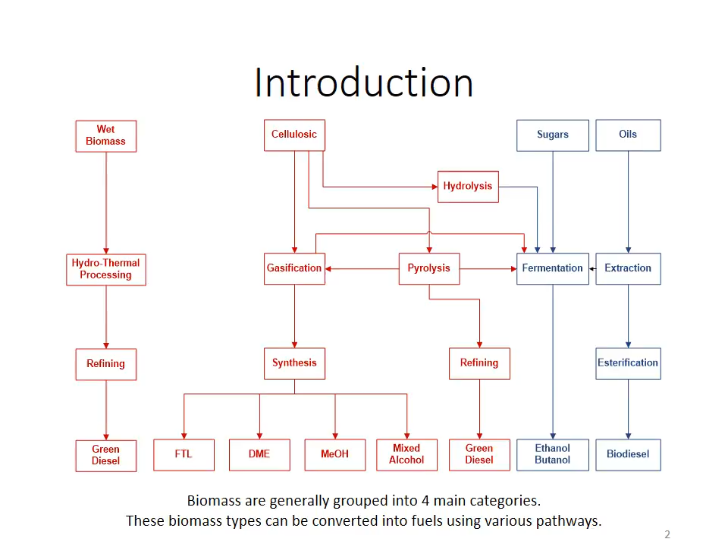The biochemical conversion is a relatively mature and straightforward conversion pathway. You start with biomass, which is brought into a facility. It goes through feedstock handling and pretreatment. In the case of ethanol production, the pretreatment is simple steam and acid to expose the sugars. Those are then sent into the solid liquid separator to remove any dirt and grime that you may not want in your conversion process.

Eventually, after conditioning and preparing it for the microbes, you can send it to the saccharification and fermentation tanks, where you're bringing enzymes that can help convert and digest these sugars into alcohol. A byproduct of this process is carbon dioxide, which is often sold to the beverage market or other alternative markets.

The alcohol water stream is then sent to distillation. Usually the raw stream has a low concentration of alcohol, and so we use distillation to purify it to over 95 to 99% ethanol. The remaining water is removed through dewatering. It usually contains the lignin residue as well, and so the lignin residue can be sent into a burner or boiler to produce steam and electricity.

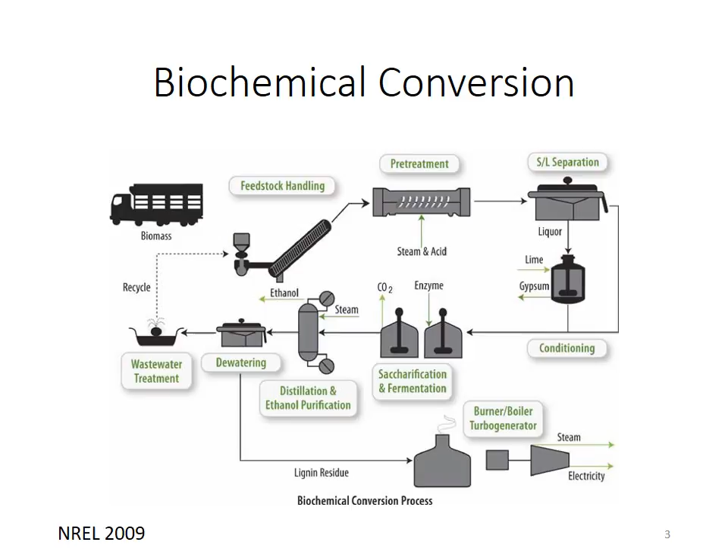What we'll see in the thermochemical platform is that not only have we increased the complexity of the process, but many of the different steps in this process operate at fairly difficult conditions. They operate at high temperatures and pressures.

So we see, starting from the left, the biomass is brought in. We also have some feed preparation. In the case of thermochemical conversion, this includes grinding the biomass, chopping the biomass into fine particle sizes, and ground biomass can be sent to a dryer, which will operate more efficiently on smaller particles than on larger particles. The dried biomass is sent to the reactor.

In the case of gasification, which is shown here, you would have the biomass mixing with some hot sand in order to heat up the feedstock to its operating condition, and this could be well above 900 degrees Celsius. When you heat up biomass to that temperature, it will break apart into its constituent molecules. Eventually, you want to produce a rich stream of syngas. Syngas is called this way because it's considered a synthetic natural gas, and it contains mostly carbon monoxide and hydrogen.

In the case of converting biomass to syngas, there are a lot of tarry components. These are viscous, petroleum-like liquids that come out with the raw syngas. Those have to be removed in order to not damage the downstream upgrading equipment. And so we use the tar reformer to do this. The tar reformer either scrubs them out or you can combust them as the stream goes through. Once you remove the tar, you have a relatively clean syngas.

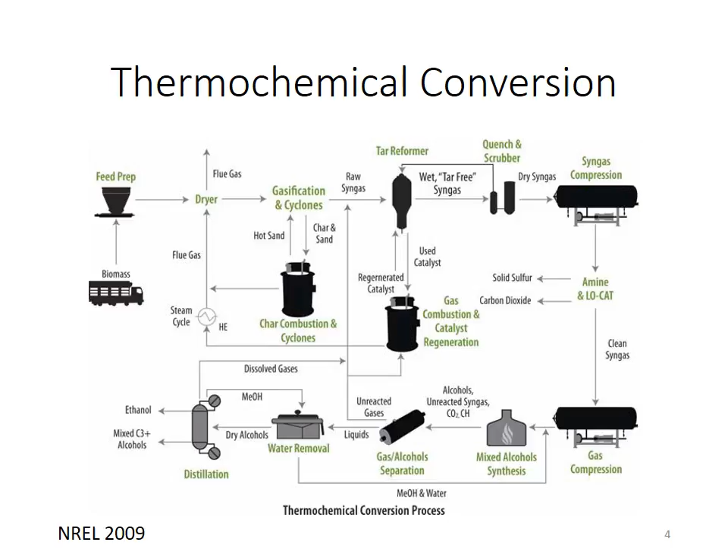As we mentioned earlier, the thermochemical platform has several different pathways from which to convert biomass into different types of biofuels. We already described the pyrolysis, gasification, and hydrothermal platforms in one of our earlier slides. When you convert biomass through these platforms, you're going to produce an intermediate product. In the case of pyrolysis, the product is called biooil, a liquid that resembles crude oil. In the case of gasification, you produce syngas, a natural gas substitute that contains carbon monoxide and hydrogen.

In the case of hydrothermal processing, you produce a biocrude, which is similar to biooil, similar to crude oil as well. The difference is that the biocrude has a higher quality than the pyrolysis oil, and so it's often termed with a different name. Biooil and biocrude can be upgraded to gasoline and diesel using cobalt molybdenum catalysts. However, if you don't want to use a traditional refinery approach, you can take the biooil and biocrude and gasify it into syngas.

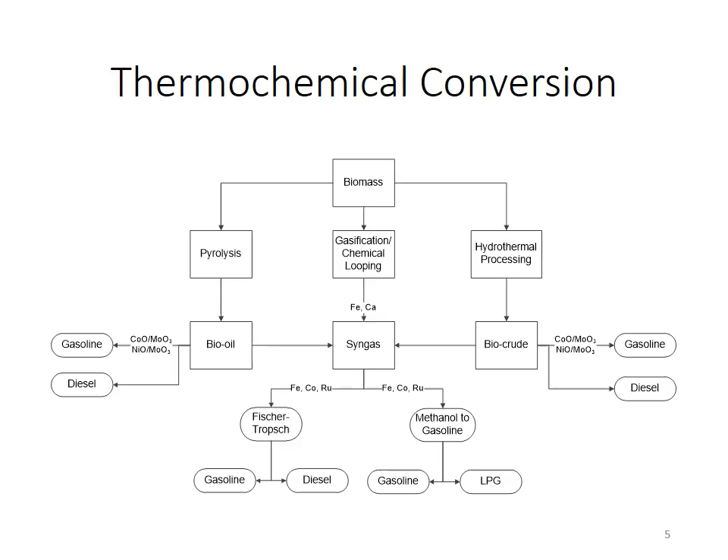Syngas is attractive because it has a high flexibility to produce a wide range of fuels. You can use Fischer-Tropsch to produce gasoline and diesel as well, or you can use the methanol to gasoline approach to produce gasoline or liquefied petroleum gas. As we saw on the previous slide, you can also use syngas to produce alcohols.

And so here's a different view, or a more detailed view, of all the different products you can make with syngas. You can take syngas and produce olefins and waxes via Fischer-Tropsch in addition to the gasoline and diesel. Or you can take the syngas, convert it into methanol, and then upgrade the methanol into ethanol, gasoline, acetic acid, dimethyl ether, formaldehyde. Obviously, you can extract the hydrogen, maybe use it to produce ammonia, which is also transportation fuel. You can use it to produce aldehydes and alcohols.

The elements that you see on the graph here on the lines are the catalysts that you can use to produce these different types of products. And so by varying the catalysts and the conditions under which they're operating, you can get a wide range of products from synthetic gas.

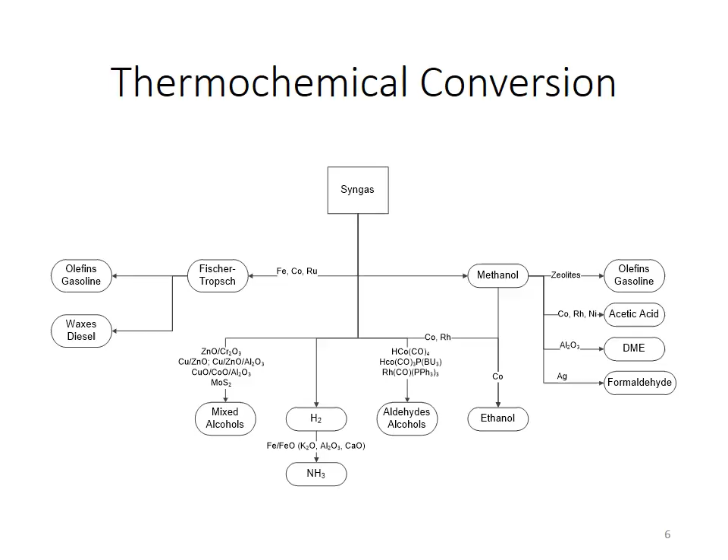Just to summarize the different operating conditions of the thermochemical technologies, gasification is generally a high temperature process, so 750 to over 1400 degrees Celsius. It can operate at pressures of 1 atmosphere to over 40 bars. In terms of its gasification, it can achieve a fuel yield of about 55 gallons per ton. And this represents a fairly high efficiency of 58%.

Fast pyrolysis takes place at a much lower temperature of 450 to 650 degrees Celsius and at atmospheric pressure. Depending on how you operate it, your fuel yield will range between 50 and 90 gallons per ton. It has a relatively lower energy efficiency, but we'll discuss this in more detail in the next slide. Hydrothermal processing can operate at a wider range of temperatures depending on what products you're trying to produce, and typically operates at higher pressure than fast pyrolysis, but lower than gasification.

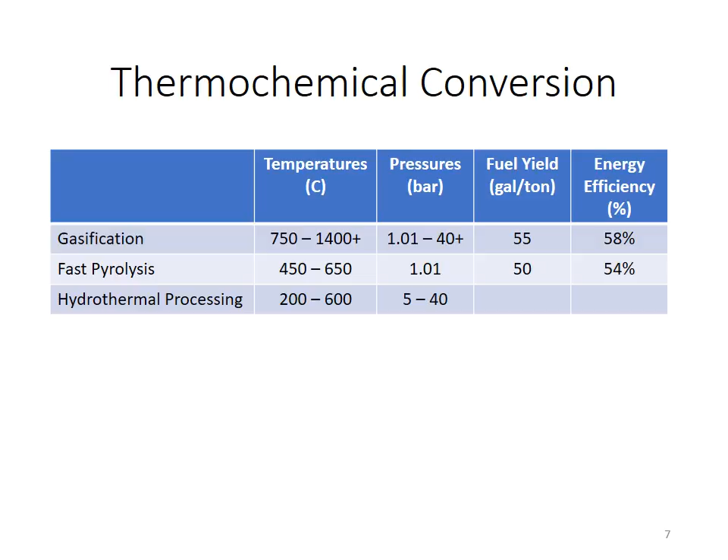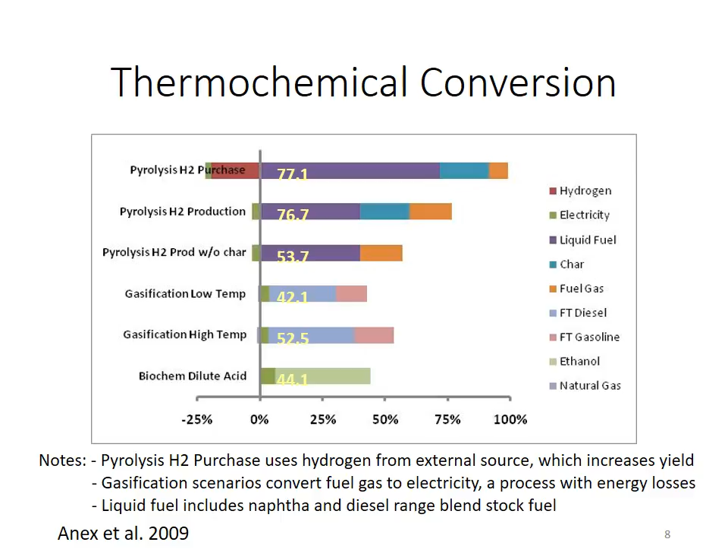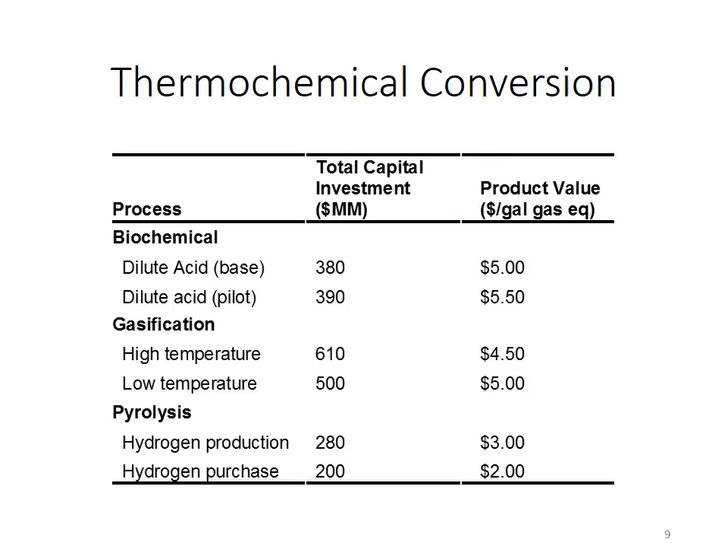All right. We grouped the biomass into four main types, and each of these types of biomass can be upgraded to different types of fuels. The biochemical and thermochemical pathways can employ a variety of complex processes to transform biomass into heat, power, fuels and other types of byproducts. The thermochemical platform in particular has a wide range of flexibility in terms of the various pathways that can be utilized to produce different types of products.